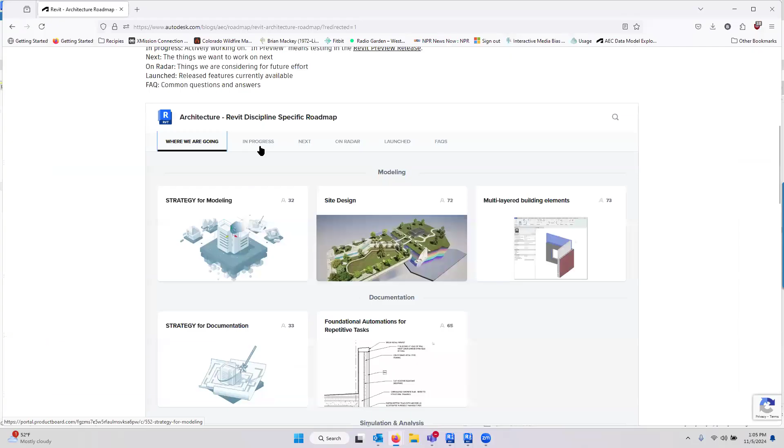So yeah, the Revit Roadmap does come in here, and you have 'where are we going,' which is the big picture, and then you have the 'in progress,' right? So go Google the Revit Roadmap, go ahead and look at this.

There were a few features in here where I thought, okay, this is going to be huge if it makes it into the 26th release. We actually joked with some of the programmers that if this one makes it in, it'll get everybody saying I want to upgrade now, I want to go to the 26th release. I could be wrong though, because most people are superstitious and don't want to upgrade anyway.

The other thing I played with a little before AU, because I happen to have Adam Sheather with... what is his automation company called? Is it Automation, or is that what it's called now? I thought it was something different, Bad Monkeys maybe. But anyway, Adam Sheather actually crashed at my house before AU, and then we went up to AU together.

The one thing he was also getting excited about, which we talked about a bit at Inside the Factory too, is that a lot of people don't know that if you have a project on Autodesk Hub, in ACC, and it's a 24 or 25 project, you can now go in and play with the AEC Data Model Explorer. You do have to enable it on your hub first.

What's really cool is you can come in here and sign in, and it shows you all of the hubs that have this enabled, and gives you the name of those hubs you're in. If you grab the hub ID and it's all set up for you, you can come down here and say, cool, I want to go run my hub, and it'll show you all the projects in that hub.

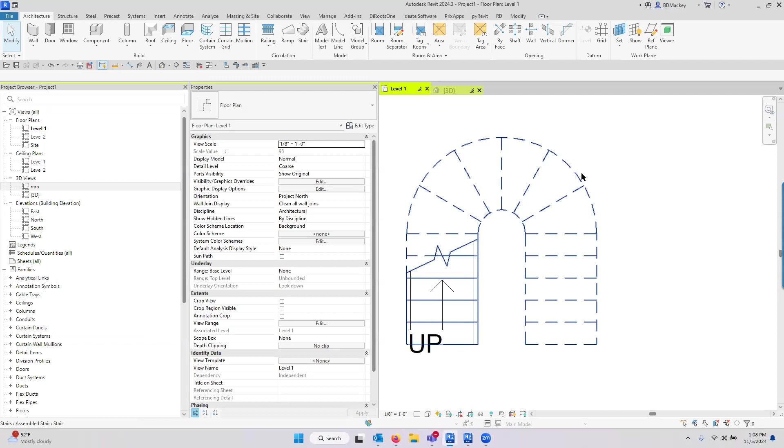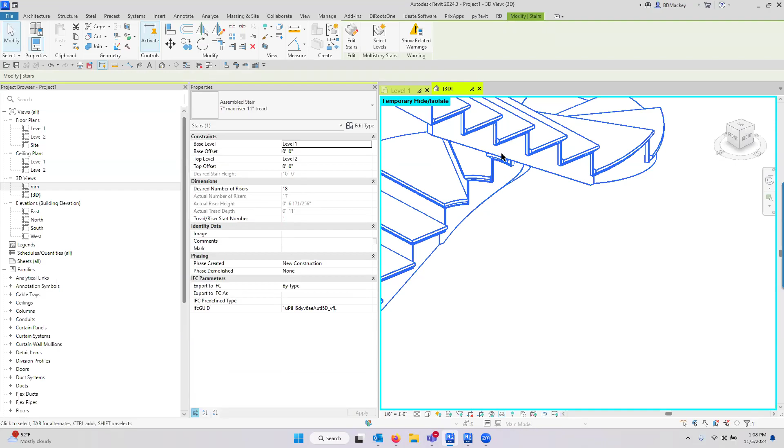He was saying he's trying to do curved stairs in Revit, and whenever he does these curved stairs, he cannot do it with a closed stringer, or excuse me, an open stringer, not a closed stringer. So we actually started looking at this in Revit. I was able to do this with an open stringer inside of here. The weird part is, for whatever reason in Revit, when you get a curve with an open stringer, you have to make sure you have an offset for the supports.

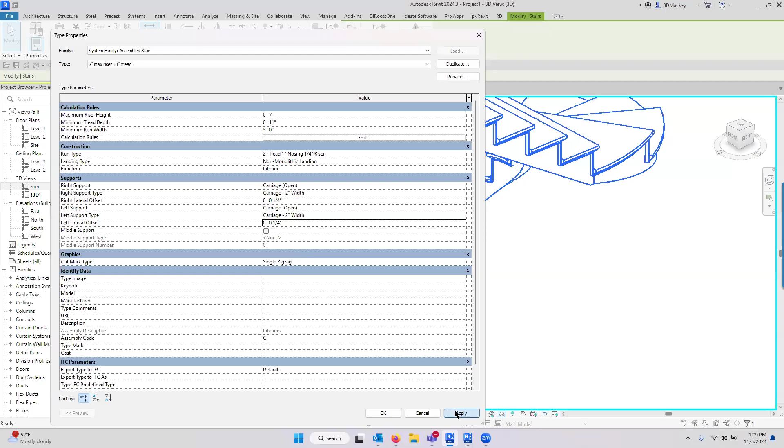If I go change these supports to be a zero offset and try it, it's going to say nope, I cannot do that. You have to have an offset in there. I don't know how big that offset has to be, I haven't really sat down and played with it, like can I make it a quarter of an inch? I have no idea, but you have to have an offset when you're going through and playing with it. Yeah, so it looks like a quarter inch, okay.

An inch would work too. So that's been a known bug. Honest truth, Chris emailed that to me, and I couldn't remember. I'm like, I don't get it, I know I've done that. You could do it, and then of course I tried it, and it broke. I'm like, wait, there was something about this, and I had to go through the database in the brain.

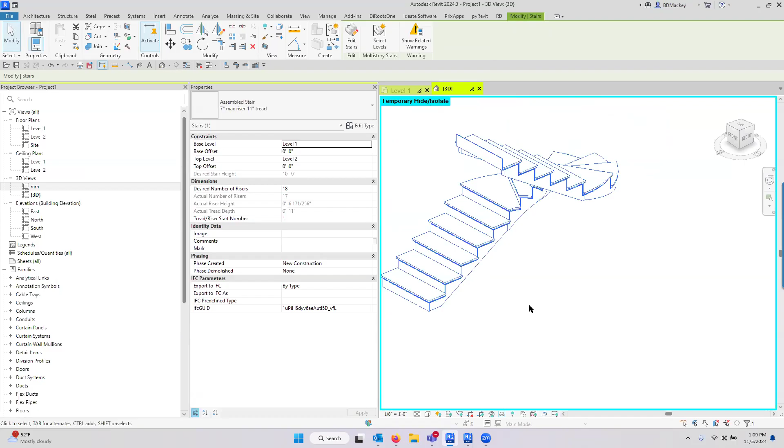So that's something you do have to have inside there. And while I was in here, I also wanted to show people, because a lot of people don't know this. When you look at the run type when you're doing a run, you can come in here and have the profile you're using go to the front and left, the front and right, or all three sides if you want. So you can change it from the default, which out of the box is just the front only. But if we have this, we're probably going to wrap that around, so you can change that nosing profile to go to only one side, both sides, or whatever you want. I always like to show that when I'm showing closed versus open stringers as well. Okay, so that was the first question I had.

Looks like we got some nice questions coming in, so what do we got there? Well, Jason had been asking about AU and inside the factory, so you got that. Nice work.

How about a quick one? Can text size be changed to points? So I'm assuming the short answer to that is no. The good answer is there's probably a calculator online that would let you do it.

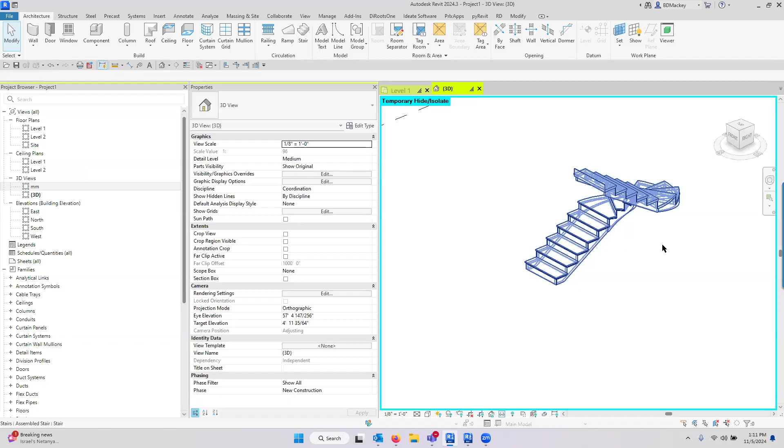Michael's asking that, and it's actually a good point. There are a lot of utilities out there that will let you take an Excel file, bring it into Revit, and create a dummy schedule with the headers and titles and whatever. But the problem with all of those is you have a point size font. When it brings it in, it doesn't choose which font in Revit for you, most of them create one, and there's no 3/32 equivalent in points. I don't think you can say make it a 13.75 point font in Word. That doesn't exist, so there's no direct translation. So yes, it's something, Michael, that does bother me that I know we have inside there, but there's no way to say, hey Revit, do this. I'm sure if you looked online there's probably some conversion factor saying if you want a 3/32, you've got to make it close to this, etc. But no, there's no way in Revit to say I want the fonts to be in point sizes.

Well, I think part of that, it would still make sense because all the fonts are scalable, right? It's an annotative object. So it's going to finish printing at 3/32 on paper. I've never known somebody to scale something on a piece of paper that is a point size. So that's it, nothing in there.

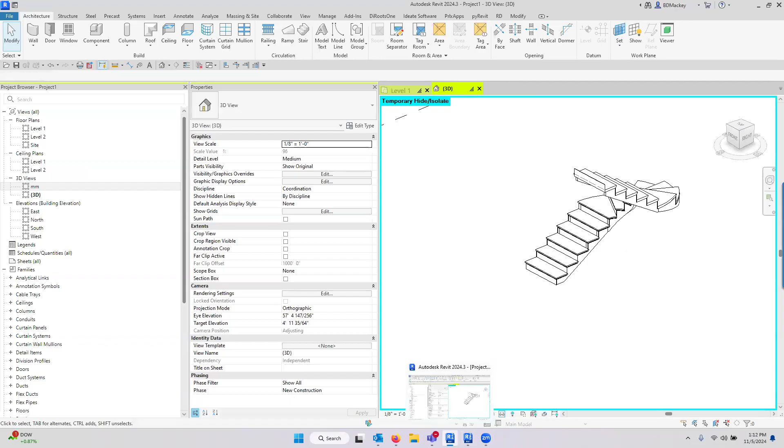Alright, let's see, Jason's got a couple on 2025, so we'll put those together. Do you have any clients using 2025 yet, and if so, are they experiencing any issues? I haven't seen anybody have any issues with it. I know a bunch of people did jump into 25. 25.3 is out, so anybody telling you they're waiting for the first service pack, they're full of crap. We're on the third, it's been out for it's been out, right?

It came out April 1st, so we are over 6 months past this. So if we're 7 months now, right? April, September, October, yeah we're 7 months in now. So we're in November, so we've had it for 7 months. I always laugh, people like, no no no, we're waiting, we're waiting, we're waiting.

But yeah, point three, or actually point two, gave us tab project browser now. The speeds are just faster. I do like the tab project browser, I'm still mostly staying in the home because I'm not used to it yet. Just all the little features we've gained inside there, it's been kind of nice, and I've noticed a definite speed improvement on this. So yeah, I have several clients doing it, they've all upgraded. One client recently upgraded from Revit 22 to 25, and it was on an ACC project, and we haven't noticed any issues in that either. So we did a full three versions upgrade and haven't noticed any problem with it.

Did you just do a cloud upgrade, or did everybody?

Ironically, we needed to move it to a different hub. So it was download all of them, open them all up, repath all the links. That was a pain. But once that was done, ironically, there was a lot less warnings.

Less warnings with MEP ducts needing to get detached duct taps and everything else, which I'm so used to seeing during most of the upgrades. So either that MEP firm did a really good job, or there was no issues with that in the upgrade.

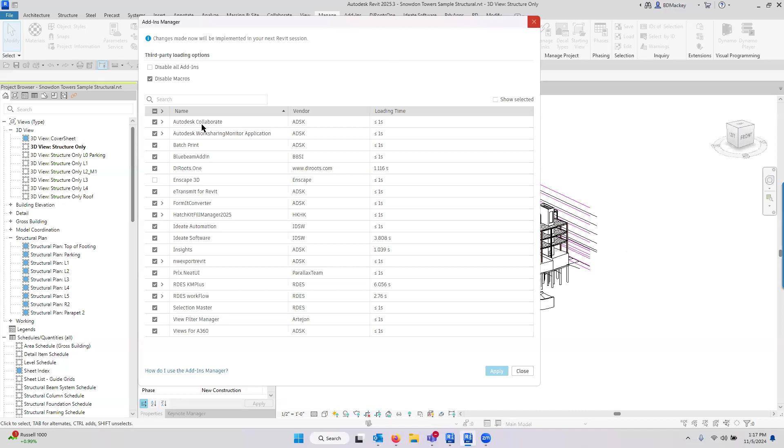But you do have this add-in manager, and like I said, you can say disable all, you can disable the macros, but it is kind of a nice little feature to be able to go through and do that too.

I like the time to load bit. You don't have to just kind of guess. I think a lot of them aren't accurate, like this one's like, oh, 6 seconds, but my Revit was taking 20 minutes to open when I had all my add-ins installed. I'm like, all of these are less than 6 seconds? My Revit should still be opening in a couple minutes.

Yeah, that's a little intense. Sarah's like, oh my God, that's the icon thing. Actually, Aaron Maller's the one who told me that. I did notice it happening to other clients, but I did not know what was going on, and Maller's the one who let me know it was Enscape. So I've disabled Enscape in all my versions of Revit. I'll turn it back on when I need it, but I can't have it hijacking my icons, because having four Revit icons down here that were the same was not doing it for me.

You don't like playing Revit roulette. Yeah, exactly.

Chris had a follow-up for Revit 25. Have you had any issues with Dynamo and add-ins in 25? I'm having some issues with a specific add-in, he thinks. I would guess probably because, when they updated Revit to .NET 8 from 4, a lot of those older packages are going to be having some issues. Personally I don't use a whole lot of Dynamo, so I probably wouldn't have noticed this, but I'm pretty sure there have been people complaining, oh, we had to go redo our packages with the new Revit .NET 8.

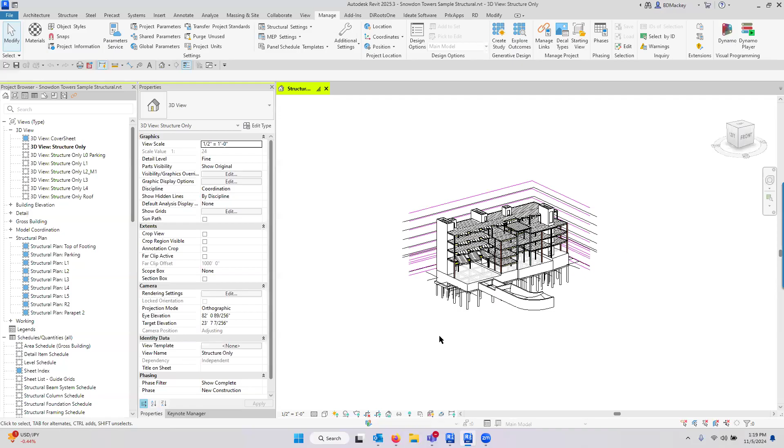I can't say for 25 because I've only used Dynamo in 24, but my problem was more with the changes to some of the nodes and the way you call things. John Pierson told me about it, of course. So they changed how you call up something — I can't remember if it was a view thing or an element thing, but we basically had to replace a bunch of nodes because they work differently. They deprecated some of the old nodes that were there and added new ones in their place.

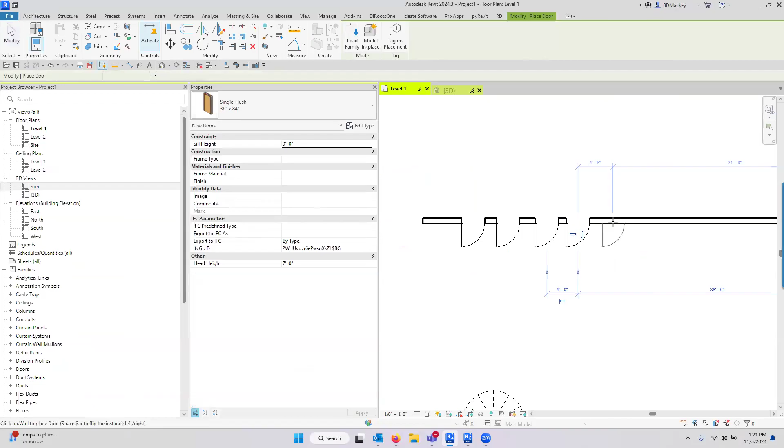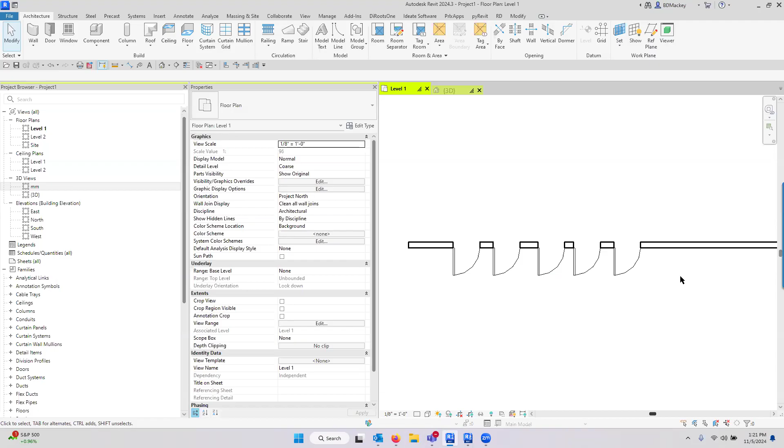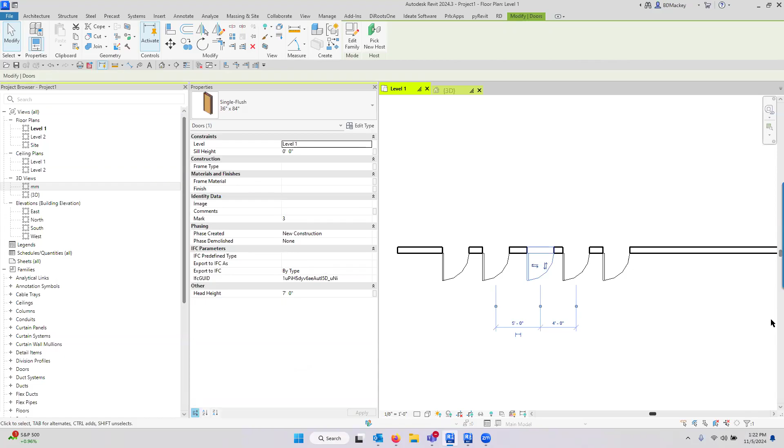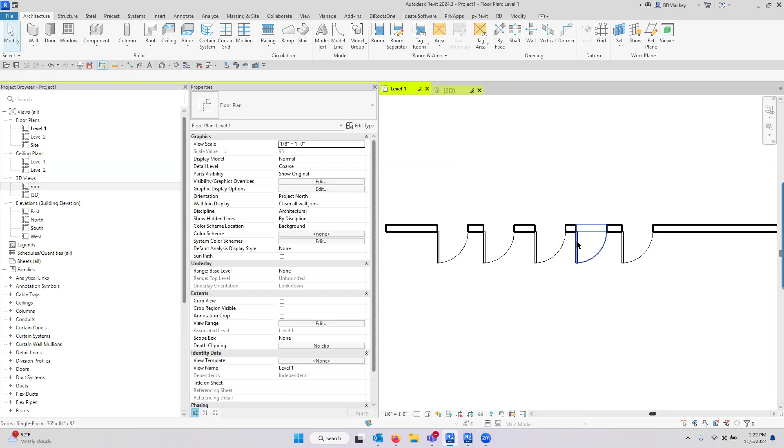The only thing you could possibly do is have a little schedule that extracted the data from these five doors, with a filter for just these doors that you put something in the comment like 'Homer Simpson,' and then your schedule is only going to schedule the Homer Simpson doors. I did have a client do that. Lately I've been doing the dumb schedules where you schedule something and use the titles for everything, so my filter is always 'filter equals Homer Simpson' because I know no one's ever going to put Homer Simpson in the properties of something.

If they do, all my schedules are going to break. Well, now. Then I'll just start switching into Marge or Bart or something like that.

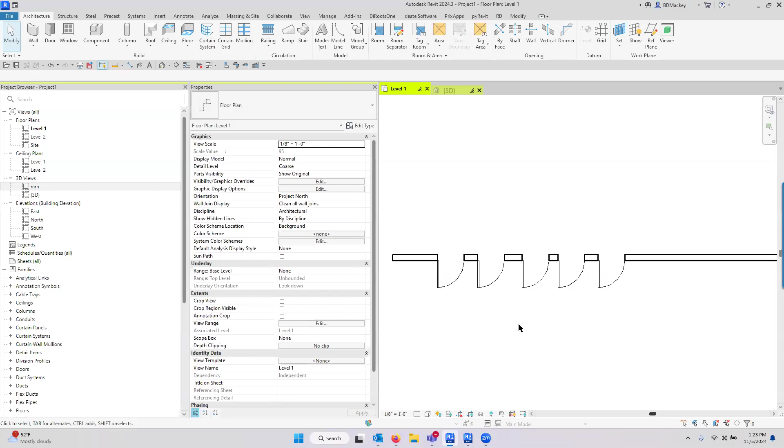But yeah, that's the only other way I've seen it done. A lot of people freak out like, no, I just want to see it on the sheet I'm in or on the view I'm in—I don't necessarily even have a schedule on top of it on the sheet. So that's the only possible way I know of to extract and total all of the data together on individual elements. Again, you could do a tag and then a multi-leader tag, but there's no way to get this multi-leader tag to calculate the values of all of those elements.

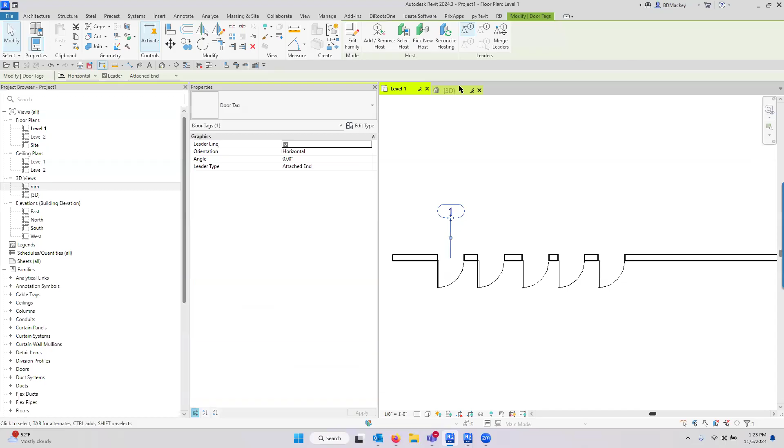So if I come up here and say I want to add the other elements—did I miss it? Add leaders... no. Add, remove host. There we go. Thank you, I have the sun coming in my window right now. Right, so you could do that, out of the box. There's probably not a type mark parameter on here, is there? Yeah, but you get the point.

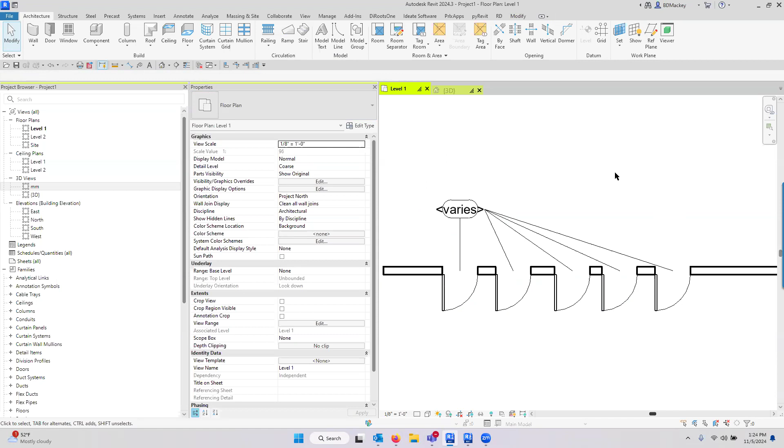So no, I have not found a way to say 'take the sum of this and this and this and all of those doors'—take the value of count, quantity, and add it all together. So I wish I had something better for you, but I don't. And then also, you're trying to say egress width total between all of the doors—again, not something I've been able to have inside of there either. So for me, unfortunately, that's usually a dumb tag I put right next to it, and I just put those values in.

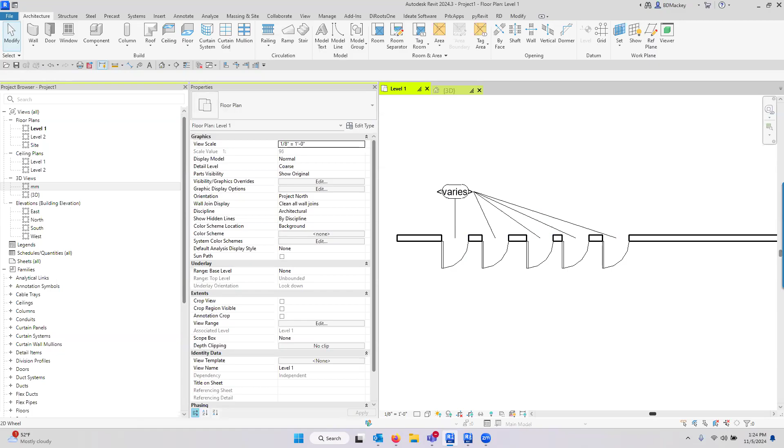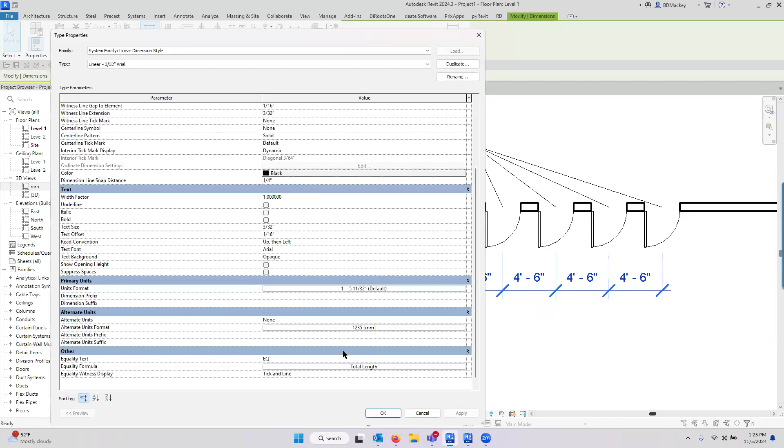Since we only have one other question, that made me think of something I don't think everybody knows you can do in Revit. I'll throw this out there while waiting for other questions: if you have a dimension string, especially if those dimensions are all equally spaced, I can come down here and turn off the equally spaced, but in your dimensions, at the very bottom, there's something called the equality formula. Right now when I look at this equality formula, I can start playing with what I wanted this to do—so I can have it say, cool, I wanted the number of segments.

So each number of segments we're going to have inside here—which one, two, it's the gaps between, or I could say the number of witness lines, which in this case would be all of the doors, whatever you're thinking of here. Then I can be like, cool, I wanted the length of each segment, move that up for the total length. So I could say the number of segments is going to be this, I'm going to put a prefix and a suffix, and I wanted the length of each segment to have the 'at' suffix in it, and I wanted the total length to have an equals in front of it.

When I say okay, nothing is going to happen here unless I go into the properties for the equality display and say, cool, I want to show that formula. So now I can say there's 4 at 4 foot 6, equaling 18 feet overall.

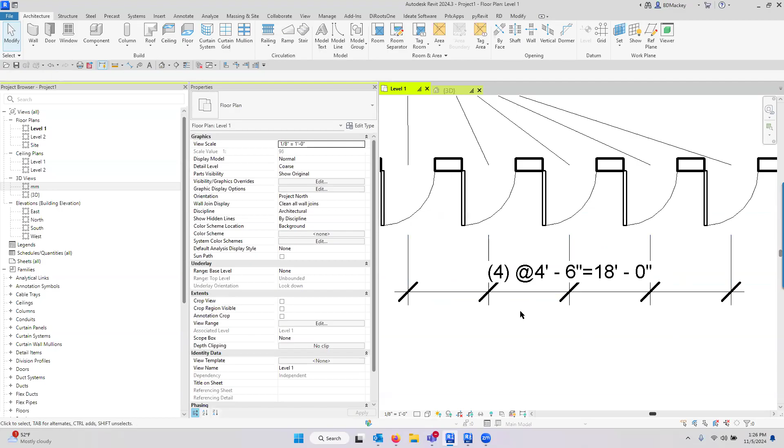So I don't think everybody knows you can actually do this with dimension styles, but you have that capability. I hate the fact that this is type based. So oftentimes, especially for my structural engineers, I have 3/32nds normal, 3/32nds beam spacing, and so on. You can start doing it in all of those cases.

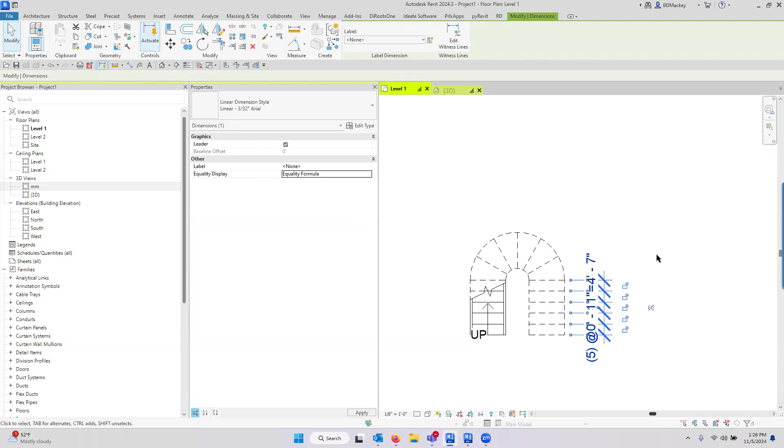Or even something like with your stairs, you could go in here and say, I wanted to do this with my stair. Grab this because they are all equal. Say, show me the equality formula, not the text. And again, I can say, hey, there's 5 of those at 11 inches equaling 4 foot 7. So you have the capability, as long as the values are equal, to kind of set this up.

That's definitely one of those things I knew was there long ago, but totally forgot where to find it. So thanks.

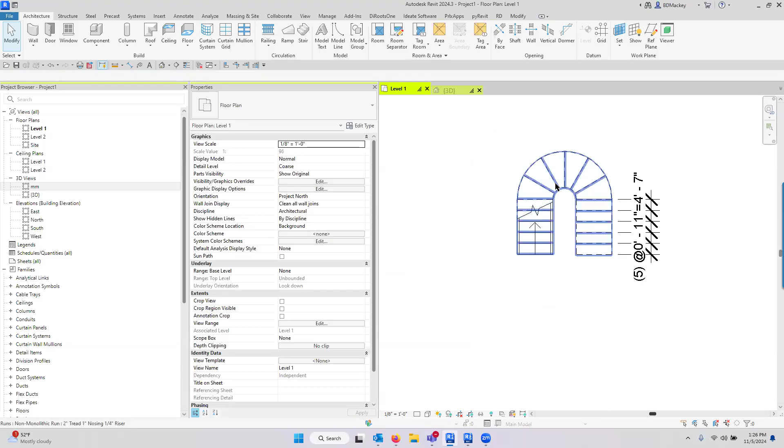Oh, just kind of like the stair questions. Like, wait, I know the answer to this, or at least I knew the answer, I did this that one time, like a decade ago. Yeah, no, I use this quite often, especially when I see people say equal, equal, equal, equal.

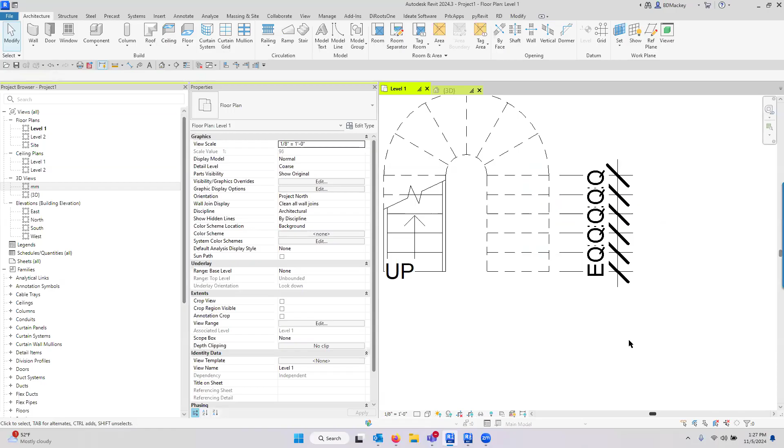I'm sorry, you can also do that here. I could change it from equality formula to equality text. That doesn't mean anything to me. So cool, they're all equal, but what are they? What's my overall distance? And then I have people do that, then they'll come in and do this and be like, cool, those are all equal, but it's 4'7". And I'm like, now you really have to math that. Why don't I just set the formula up and be cool? Here's what we got.

Yes, that does make way more sense. I love that feature. I always like to show it.

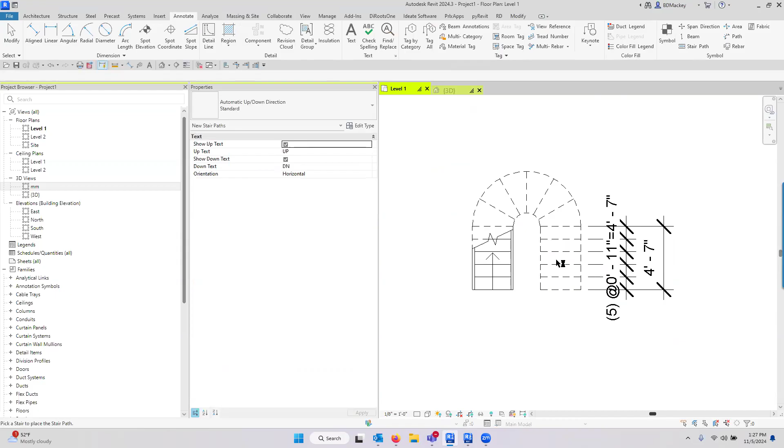The other thing for the architects in the room that I don't see anybody do, on the annotate tab, one of the tags you actually have, oh, I did not go to 3D, let's stay here, is stair path. You can actually tag the stair path of a stair, which is not that big of a deal, it's just going to give you the up down arrow like this. But you also have, where is it, I think it's under the tag area, tread numbers. So I don't think a lot of people know you can actually tag tread numbers inside of here.

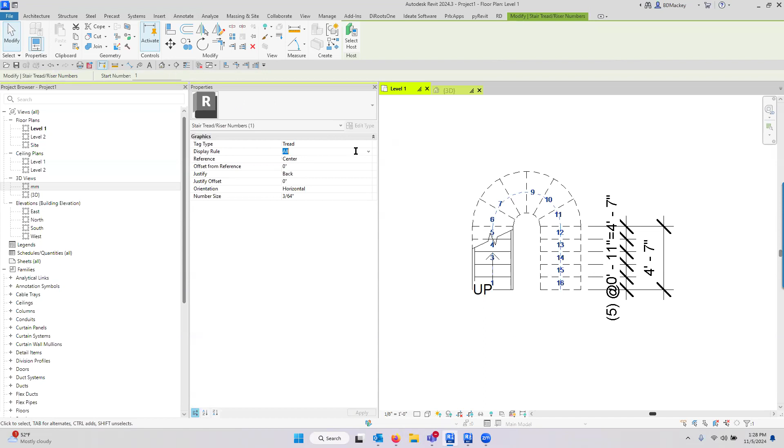Once you tag them, you can actually select it and see, cool, am I grabbing the risers or am I going to grab the treads if you wanted those numbers to change? What's the display rule? Do you want to display all of them, odds, even, only the start, only the end? You've got a little different options here. Am I going to the center of the stair, all the way to the left of the stair, or am I going to actually add all of them in here.

Excuse me, wrong button. All. Do I want to go to the center, the left quarter? It'll go to the quarter of it. You have a lot of different options inside of here. And then you can also offset it. How are you justifying it? Text can be horizontal, vertical.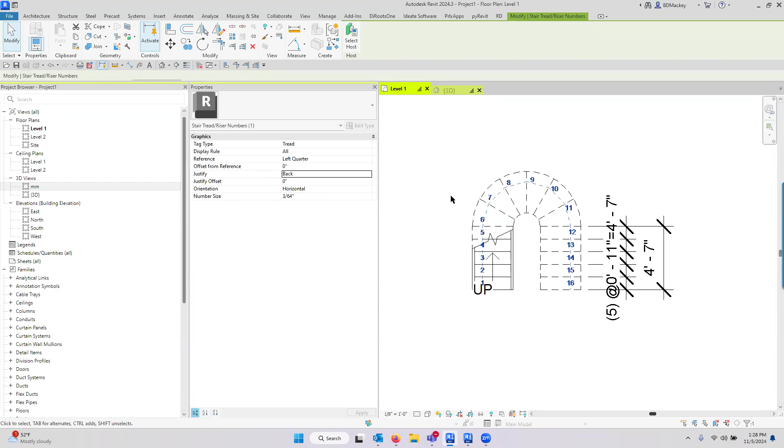And you can also do this in a section too. So if you happen to have a section, this is usually going to be a residential type thing. But if I go to that section, I can still do that tag, that tread number in the section. Well, that's fun, that's a fun feature.

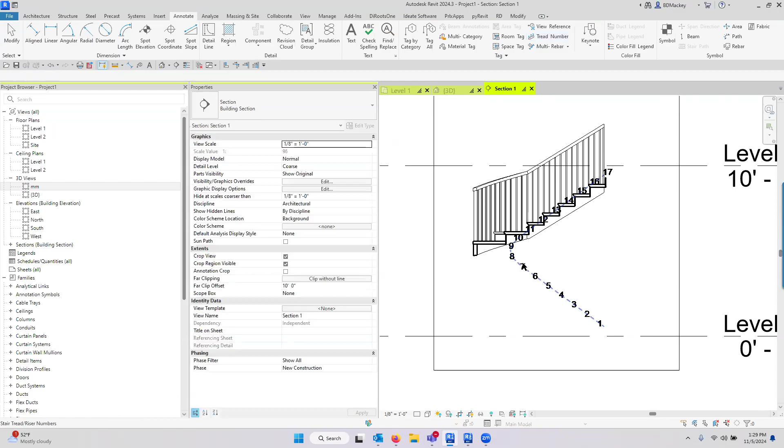All right, we'll flip it so we can see the other half of the stairs. Flip section. There you go.

So just one of those features that has a lot of different ways to be able to come in and start playing with this stuff.

Also, did you guys know that too? That if you grab a crop, I always see people going to a floor plan to grab a section to hit the flip control. But if you're in the section, you have to have a crop region visible. If you have a crop region visible, you can select it and say flip section here. So you don't have to leave the view to flip the section.

I use that one often. I just know after time I do it, people are like, wait, what did you just do? How'd you do that? Spacebar, unfortunately, does not work like everything else.

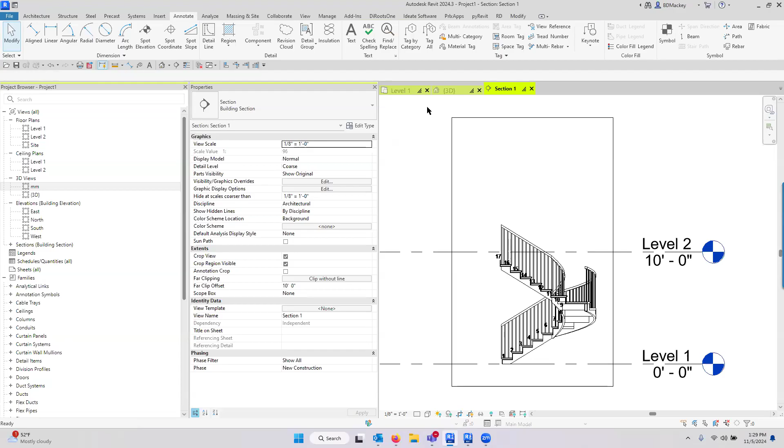I also learned something new inside the factory from Paul Aubin, and I did not know this. Did you know that if you have something and hit rotate, then hit spacebar, it puts you into the move, the place origin marker? Oh man, that's one of those I knew at one time and always forget. Yeah, I did not know that one.

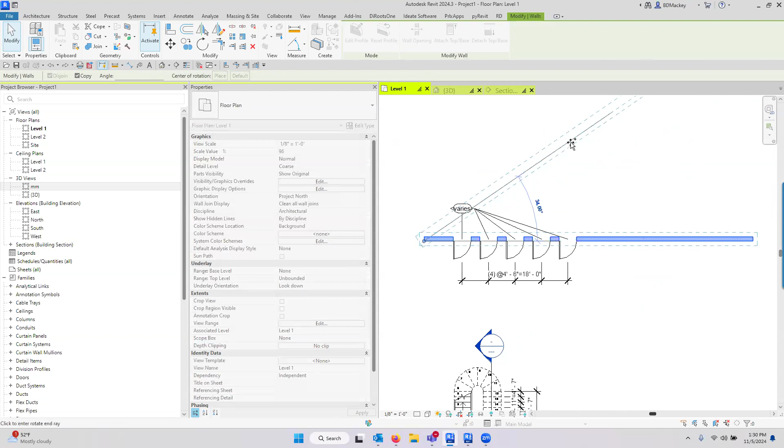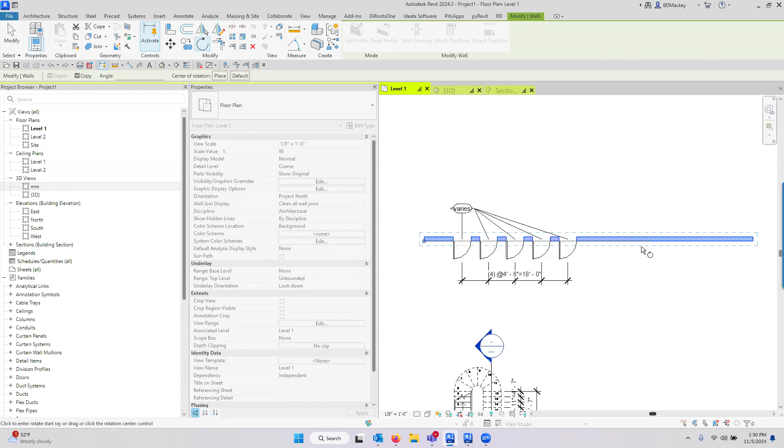I taught him one in return. If you just grab something and type R3 on the keyboard, it puts you into the place origin marker without even going into the rotate command first. I didn't know spacebar gives you that because I'm not usually a two-key typer. I don't want to put my donut down, so I hit rotate. I'm still old school, I drag the icon because I've always had to in old versions. So I rarely hit the place button. Just not something I do that often. But yeah, I did not know the spacebar was on there.

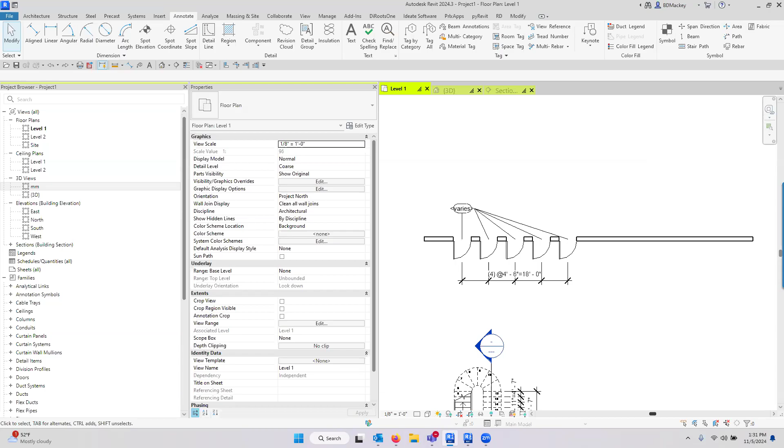Design option. So how would you handle bid alternates for submittals and removing them if not accepted? I would think design options, even though they are a pain for MEP. Ah, okay, thanks Rick, less confused.

So yeah, I mean, I know design options doesn't really work with MEP if you're trying to connect to a duct and do all of the analysis. You can use design options in your MEP stuff, you just can't use the calculations or wiring tools you need there. But if it's literally just bid alternates for now, you would start going in and doing those design options. So I know it's a horrible thing for mechanical, electrical, plumbing.

It's not bad for structure. It's obviously not bad at all for architects. But yeah, I think you're just going to have to go in and start using those design options to go through and do it. Now with that said, if part of that bid alternate is saying, yes, but if we do this one, we've got to double the size of this mechanical unit, then you might have to start modeling the whole entire run.

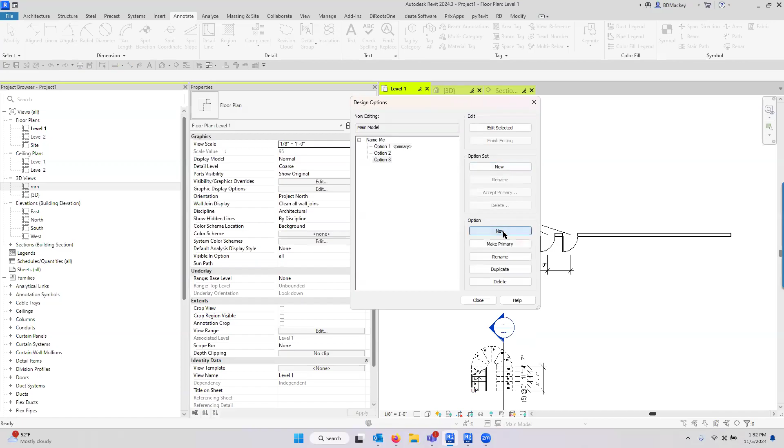I know oftentimes people freak out about that because they're like, cool, I'm going to go set up a design option, new, there's my option set. I always tell people to name those. It drives me crazy when it just says option set one. So give it a name, right? Then you can have a couple options underneath it. The one thing I always try to tell people when dealing with this, especially for you guys in the MEP world...

If you're like, cool, my option is going to be at the end, or maybe it's going to change out the rooftop unit, or whatever is going to happen, if you grab a series of elements and hit the little add to option set button down here, you can add it to all of those options at the same time. So yeah, it does suck if you come back out and try to reroute the path and you got to update it in all three, but you can use this button to put it into all three.

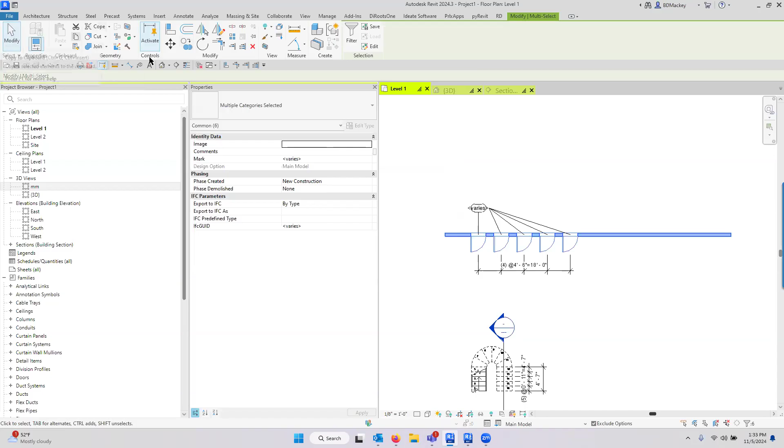Or alternatively, if you're like, man, I think I might need it but I'm not sure, you can copy or cut those to the clipboard, then go start editing those different option sets and just do paste same place. So if it's not the whole entire thing you want to do, some of it, cool, there's my same place for option one. Maybe I wanted it in option two as well. I have no idea, but you can start coming through here and tweaking it as you see fit for those different design options. Or switch to a 30-inch door.

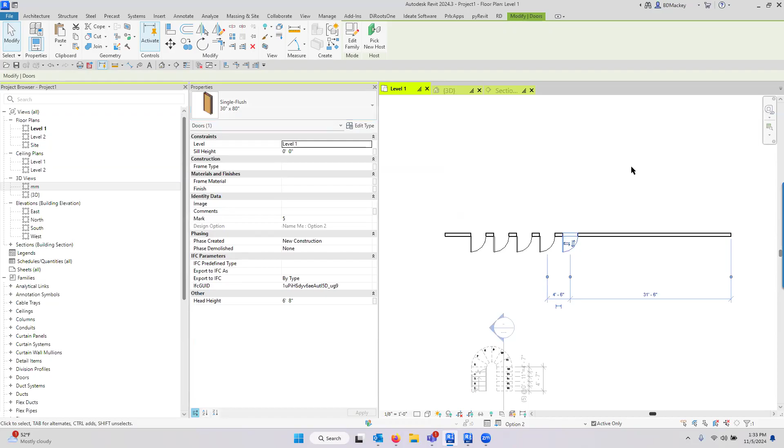Once you start saying, yes, this is the one we're going with, unfortunately architects are horrible at removing the other design options. So once you're all said and done with that, you go back to the main model.

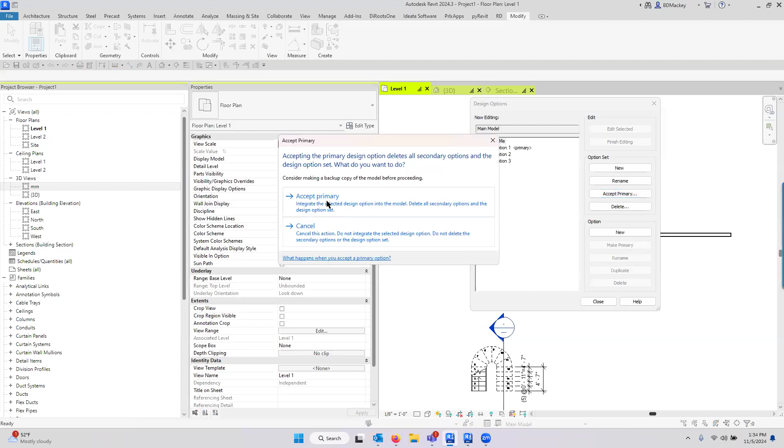When we come in here, whatever is primary, you have the capability to accept that as primary. I want this primary one to be the one we went with. When you accept the primary, all the design options are going to go away. What freaks most people out is once you do that, it's going to tell you it's deleting things.

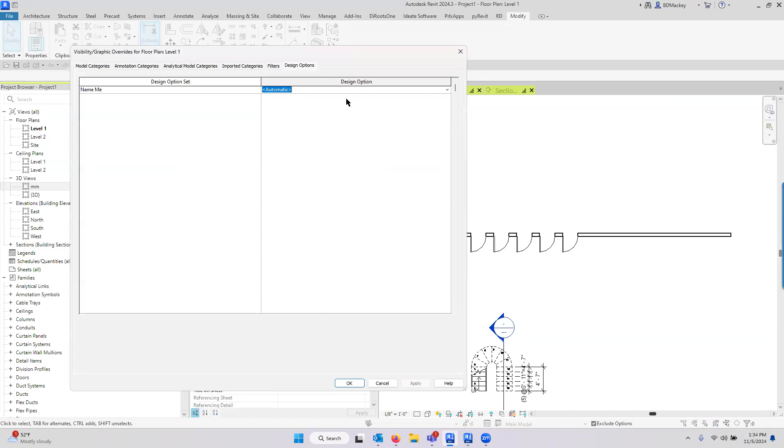This is why architects don't do it, because they freak out. Oh, it's deleting everything, oh my god, I can't do that. And the list is never one thing, it's like all of these views, all of these things, and it just freaks them out. That's what it's going to do, and that's why architects never get rid of them.

I go into projects, get as-built models from building owners, and there's still design options in there. I'm like, what the hell? This is not as-built if there's design options in it.

We would definitely get rid of the design options, but we would also always archive a copy first, because this is definitely the option we want.

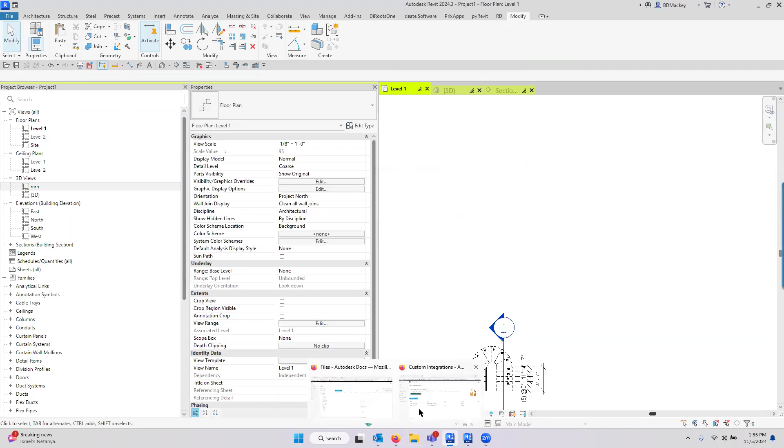Never happens. Yeah, exactly. They never remember anymore, like two months ago when we did that thing? Well, I stopped archiving. The only reason I stopped archiving is because in ACC, we literally have a version of everything.

So that's the biggest thing for me when I go in there: I put comments, like hey, this is when I synchronize before accepting design options, and then I do my design option acceptance, and then I synchronize again.

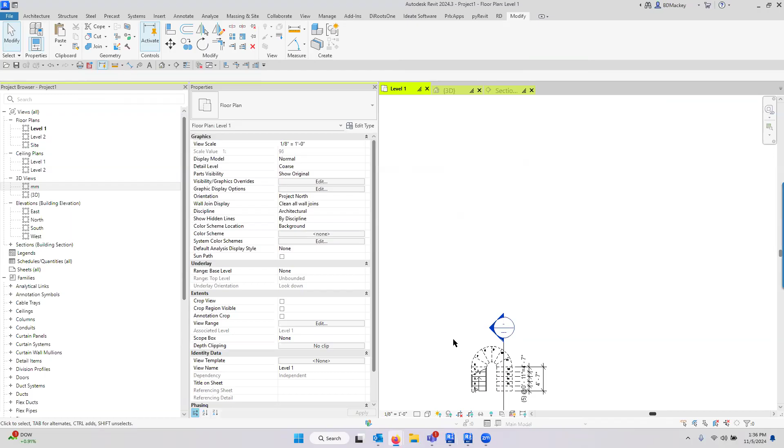I don't know if a lot of people have ever done this, but if you are in a project in Revit, when you synchronize, you can actually put comments.

And if you actually go in and put comments in there, that's not what I wanted to do, wrong button. I meant to say view versions. So if you go in here to version history, it will show those comments.

Oh, there was one. Where'd you go? I saw it. It's one of our students, blinked up there for a second. Oh, there it is.

For me, I always put comments of what I've done. I don't do it every single time I synchronize, but this is definitely my version of archiving if you're on the cloud. Nobody ever does this, but I do it all the time, especially because I'm not in clients' files doing a whole lot.

Hey, I opened with audit, I compacted central. I go through and I always set this up. But again, that's definitely my version of archiving now: hey, this was the end of SDs, this was the end of CDs, this was the end for 10%, whatever.

We accepted this design option, holy crap, we blew out all the blah blah blah because of a design change, whatever. I always put those comments in here. And then I don't remember what version it was.

You can actually say open on these old ones. We used to only have restore, but if you say open, what it's doing is opening a detached model of that version. So you can grab that version as a detached model.

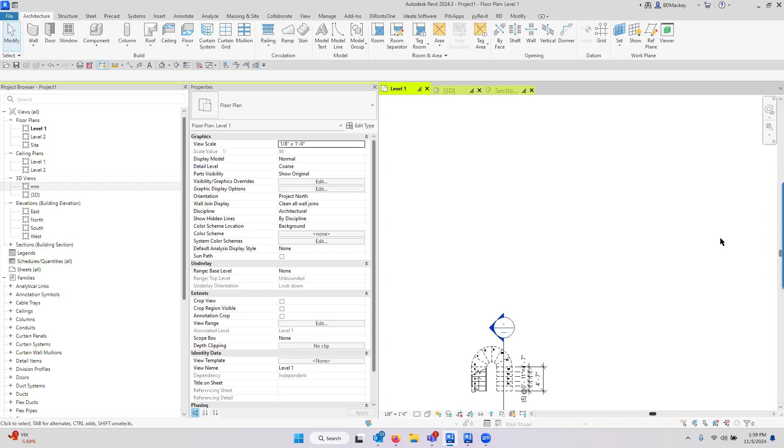I guess I was more wondering, does it upgrade all of your backups, or would you have to go back? It's 24, weird. I've done it before, but then I think it was some weird thing I had to do, and I was like screw it, I'll go download the published version. But again, I do that same thing on the published versions—I go add comments. Like when I open up an ACC, I will go add comments on some of those older versions or put a note in there.

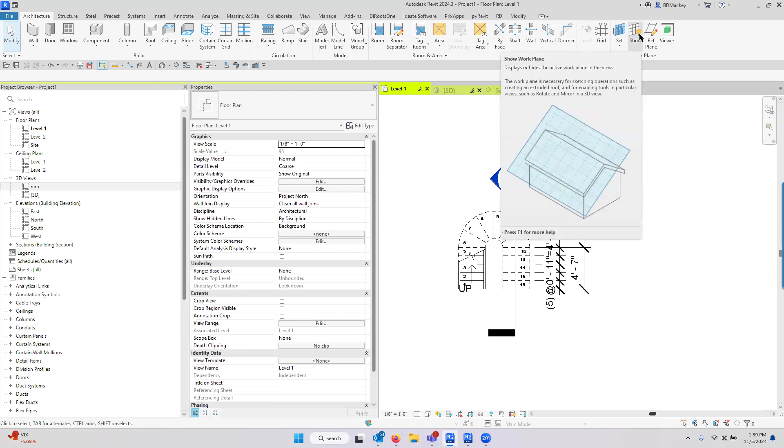So Jason, I hope that answers your question.

Would I use design options? Absolutely, I would—it's what they're there for. The worst thing I see is when somebody does a save-as in the model. I hate that, because then somebody says, cool, I want part of this, part of that, and part of that. Then it's a whole lot of copying and pasting, and half the time I'm like, screw it, I'll just remodel the damn thing. Yeah, that's true.

So what's our next question? Beth was asking if we know anything about the 24.3 Unifi issue. I don't know what that issue is specifically—there's so many issues with Unifi and searching in content catalog.

Beth, can you be a little bit more specific? Hoping Jason can answer, because Beth is so in tune with things inside the Autodesk Factory.

One of the breakout sessions was with the woman from Unifi, and it was funny because she came in—I was expecting her to start talking about how they're going to tweak it, but she just was literally getting grilled by everybody in the room. I felt bad for the woman. I didn't know her personally, knew other people from the old Unifi. She was literally shaking when we got in there, so I tried making light of it.

I think one of the big things is Autodesk is being very open, at least in a lot of things, about what their immediate plans are, what their immediate plans are not, what they're currently working on, and what's not even on the roadmap. So I think one of the things is try to get into Unifi, talk to the people at Autodesk who are the old Unifi people now on the Autodesk content catalog team.

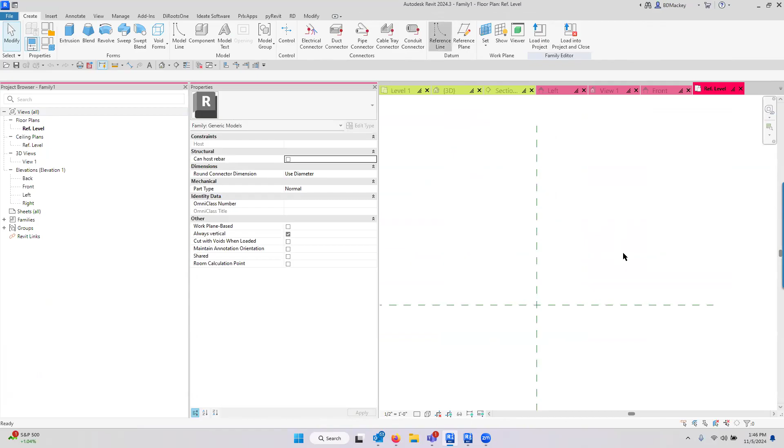I can do one real quick. By the time I find that family, I can probably create a new one real quick. So if I come in here and I do a reference line, and then I align the ends of that reference line to make sure it's constrained here and here, and then I do an angular dimension here, right?

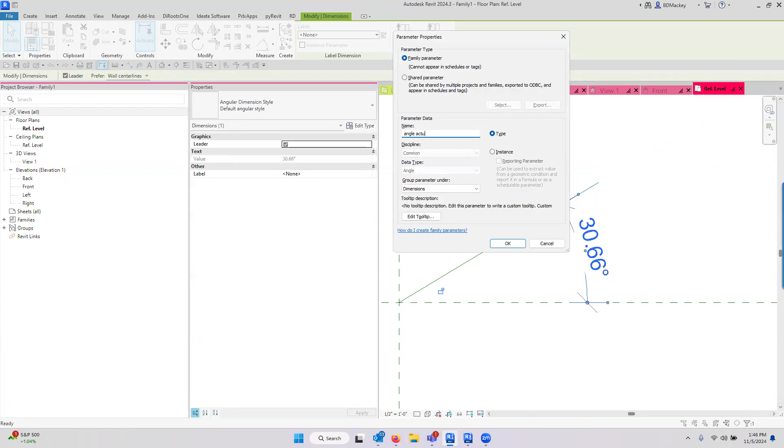I can come in here and have this one be the angle actual, right? So I'll create this one, and I do this quite often on things, angle actual. And the reason why that's called angle actual, and set up there, is because then over here I can have it be either or.

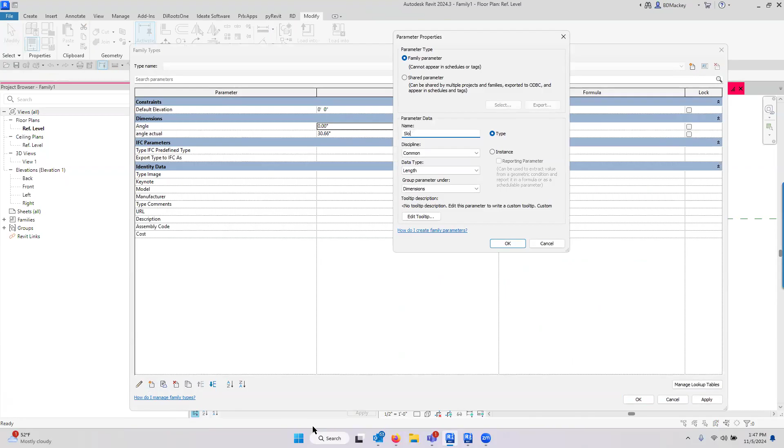So I can create a new parameter that's going to be like angle, which is an angle parameter, or I can have a new parameter that's going to be slope and have that be a length parameter, right? So if it's going to be like a 4-in-12 slope, so a 4-inch slope, right? Then under angle actual, if slope is greater than 0, this would be the A-tan of rise over run, slope over 12.

Otherwise, I can say use the angle, right? Or get a little bit more in depth, saying if the angle is greater than 0, then use the angle as well. So you can start doing something like this. If I come up here and say the angle's 3...

I'm just trying to expand you back open. What did I do? I hit, I think now I got to... oh, I have a 3 in here. Let's say, what is going on?

Right, so if I come up here and say, hey, this angle is going to be 3, then it's going to ignore the slope being greater—so I probably do, but I change this to 0, then it's going to say cool, it's 3. But if I say that's going to be a 4-12, then it's going to ignore the 3.

But I can't get both of them to update at the same time. I can't get this one to update that one because there's formulas involved in it. So, but yeah, you could simply do something like that, and I do this often. I call them 'actual'—hey, this is my angle actual, this is whatever. And I'm doing that because there's some sort of conditional statement in there doing it.

So then I can do the same thing here: if angle is greater than 0, then angle, else 0. So if I make this one 0, then that's going to be 0. This one 0, it's going to be 0. But if I come back and make either one of them have a value, it's going to give me the value.

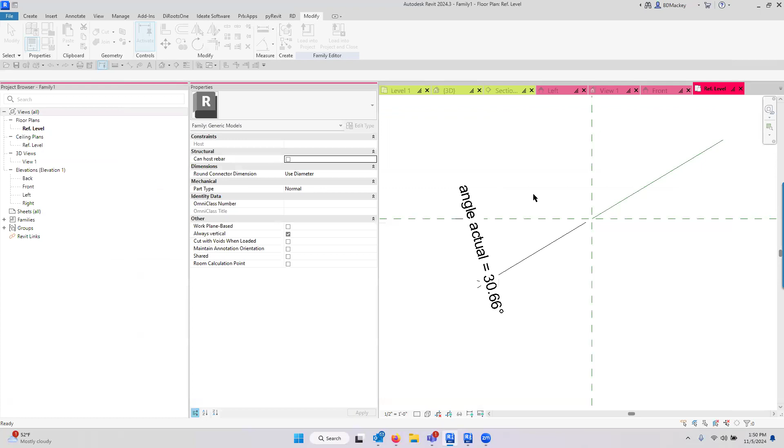So hopefully that made sense for you.

Oh, Rick's like, I don't understand what the lock is. So yes, the lock is simply this: if I've got a parameter here and a parameter here, right, I'm going to do a dimension from here to here, and then a dimension from here to here. And we're just going to call this one A... sure, we'll call this one B. I love Zoom and Revit.

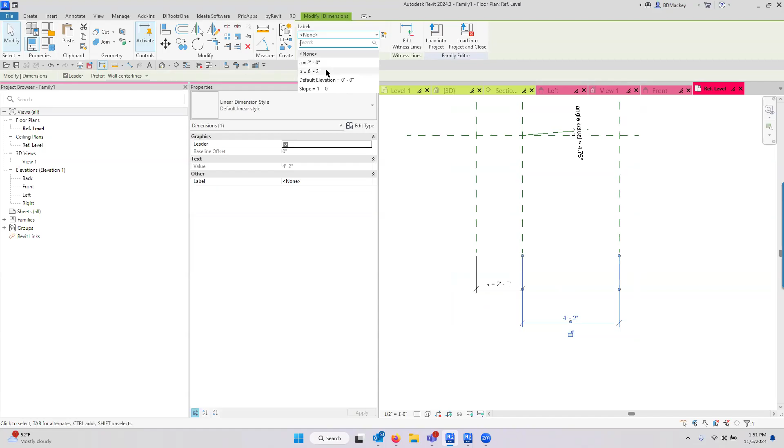It's so laggy, right? So what the lock does, and you can turn the lock on here, is that if I take this value and move it, it might adjust this one, right? And actually it would have been better to do this... I think, we change that back to B. Well, but that one's pinned in location. God dang it, because this one's pinned.

So let me take this, let me delete this. No, yes, hang on, shut up. And delete the whole thing. Delete, move this over here. And then let me dimension that and make it A. This is a way better example.

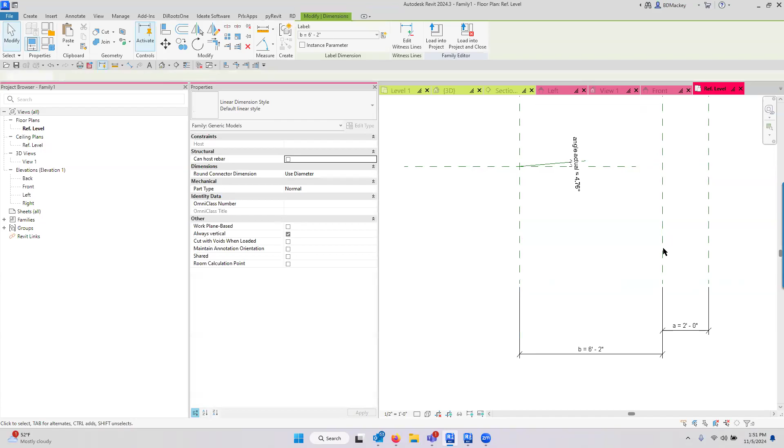Make this A. So if they're both unlocked and I take B and start moving it, B is going to change the size of A. But if I lock this and this, and move either of them, that's going to come along for the ride. That is literally all the padlock does because I said 'lock value', so that's literally all it does.

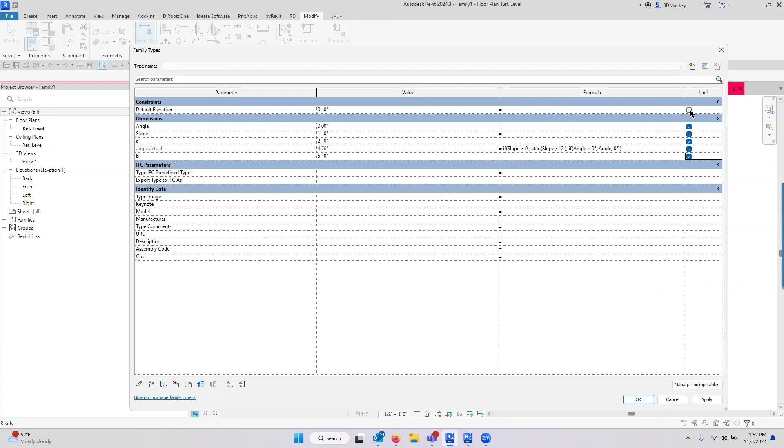Yes, it's the same when you're locking it on the screen. That is literally all it does—it's saying, hey, if something moves on the screen, am I going to maintain this value or allow the value to stretch? I lock all of them because I usually treat these things as based off of each other, and I don't want one thing stretching and not the other. So my habit is I lock them all in the family editor.

All right, so there you go. Cool.

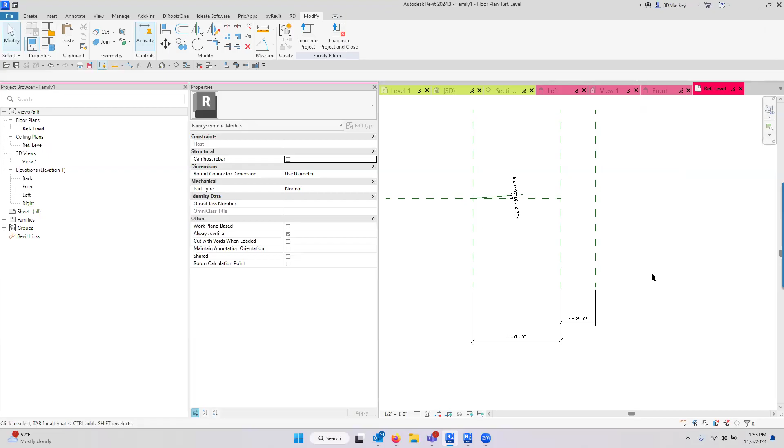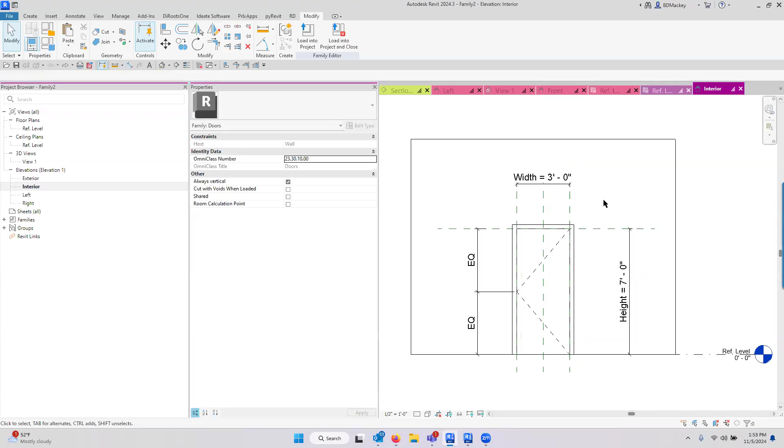Yes for dimensions, no for reference planes. It drives me crazy when you start with the out-of-the-box template and you get this frame projection interior or whatever equal dimension—this one pisses me off. I have an equal dimension here in plan, but then I have to go to the elevation to see the width dimension here. You're like, cool, I want to delete this... it's actually letting me delete it. I didn't think it was going to, but I want to delete this and it won't let me. So the easiest thing I always tell people: draw a new reference plane, drag that dimension to the new reference plane, delete the reference plane. That's how you get rid of dimensions that are in there.

So I think it's this frame projection interior—if I just try to hit delete, no. There used to be something in here, I don't remember what it was, that you just could not delete one of those dimensions. So yeah, grab the dimension, grab its grip, move it to something you can delete, delete the something you can delete. But the reference planes, if they were created in your template, no, you cannot delete those. Like I can't get rid of the center one there—can't do that, it's stuck. Probably can't get rid of the front one either. There's just no way to delete those objects.

Oh, there's my otter, who's giving us all takeaways.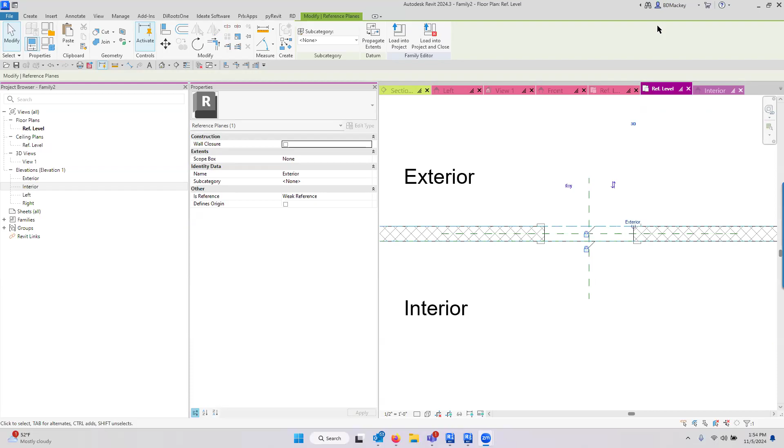So Jeremy is asking, not necessarily for a demonstration of the workflow, but do you know if it's still possible to replay a journal file to automate repetitive tasks across multiple Revit files?

Absolutely, it depends on what your journal file does. Journal files are used by Autodesk for regression testing, which means they are very particular in the way they're set up, designed to figure out if Revit is going to break. So everything has to match pretty much precisely. If you're saying, hey, I did something in project A and I want to do that in project B, that is never going to happen if you're selecting elements or doing things like that.

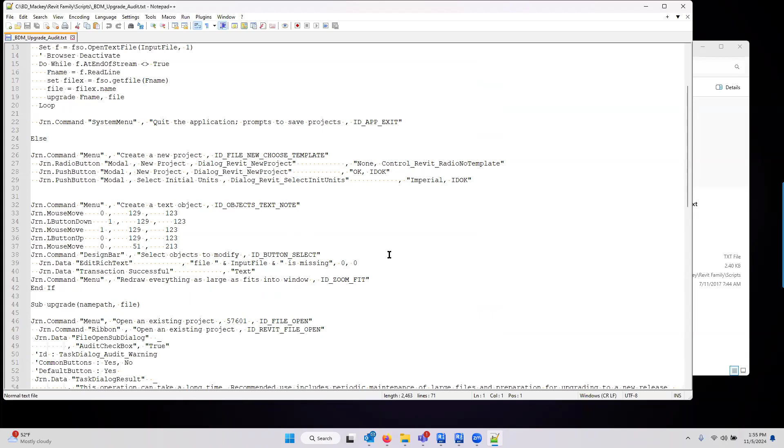But I use journal files for quite a bunch of things. I use journal files to upgrade my families every year. Inside of here, these little TXT files are all my little lists of the journal files I like to use every time. The biggest one I use is my upgrade and audit file—it opens files from a list with an audit, saves them, closes them, and is done. The way a journal file works is you drag and drop the journal file on top of the Revit icon.

The way this journal file works is at the very beginning it says look to this file—use this file as your opening file to get all of the families you're going to be using. For me, I have a little BAT file, it's called my Revit projects, where's my BDM, RFA—sort these by types. I run this little button here and it just creates me a list of all the files when it's done, so I get a list of families. I should probably go into an actual folder of Revit families.

Go ahead. Now this file has been updated today, and this is literally a list of every family in this folder or any subfolder, and their location. Then when I drag and drop that icon, whichever icon or journal file it might be, onto the Revit icon, it just starts going through that list and running it.

On some of these, it might break, saying there was an issue in this family, or you did this. The biggest thing with journal files, like some of those other ones I had where I was upgrading the arrowheads because I didn't like how they were named, is you try not to record your journal file by clicking on the screen.

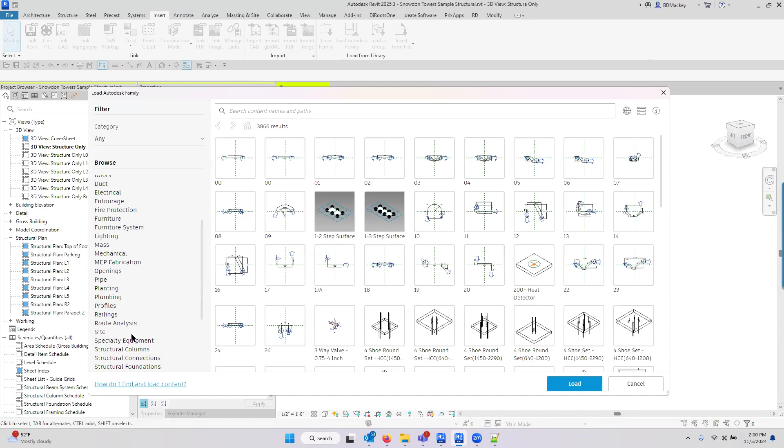Oh yeah, then down here you can see you've got the, sorry I keep saying ANSI, the AISC versions. Otherwise you just go to the old ones. So these are the old ones in Revit, and these are the newer versions. But you can also download those, I just forget where that is.

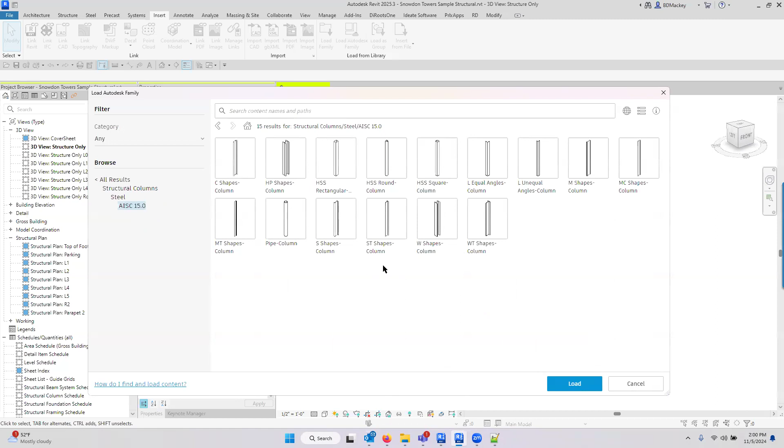Cool, and what's our last one? All right, our last one is: can you show how to get roof framing to slope correctly with reference beams and columns along an exterior wall, to show the roof framing pitching to drains along the cross slopes?

How do you get the framing to attach to one another so we don't need to try to adjust framing piece by piece? So if you open up the sample Revit structure file from 2024 or 2025, it is done inside there.

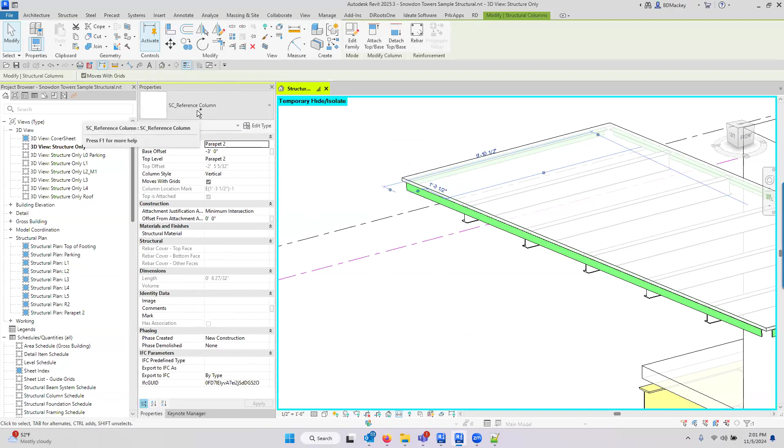So in the Revit structure sample project, I did this inside of here. If you actually look inside, if I do a selection, you're going to see that in my structural columns, it's called the reference column. What's happening inside of this file, I should have selected something first, I have a column inside of here.

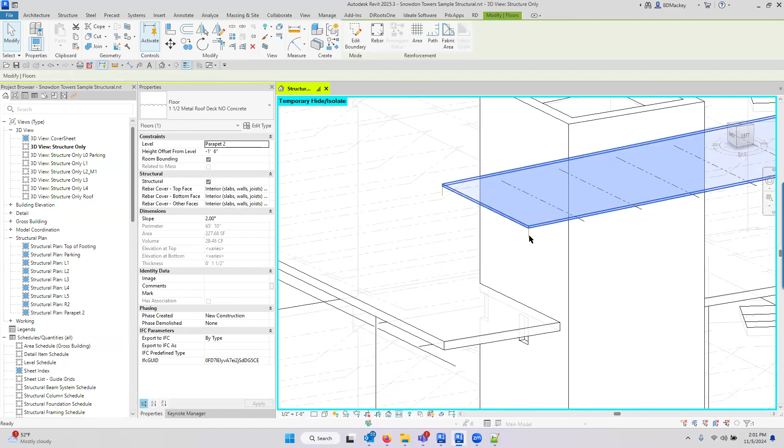If I go to a coarser level of detail, you should see these little orange lines. These are my reference columns. When I draw a beam, in the properties of a beam you have a start attachment type and an end attachment type. By default, that value is set to the end elevation, meaning you are putting it at the end elevation.

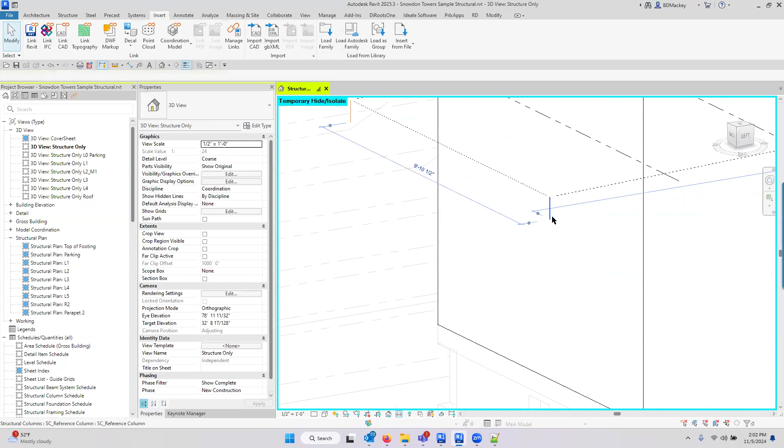If you are modeling this into a column, you get the distance option, which means if the height of this column, or the top of this column, moves up or down, I am going to move with it. So then I take this reference column and use the attached top to attach it to that floor, that roof.

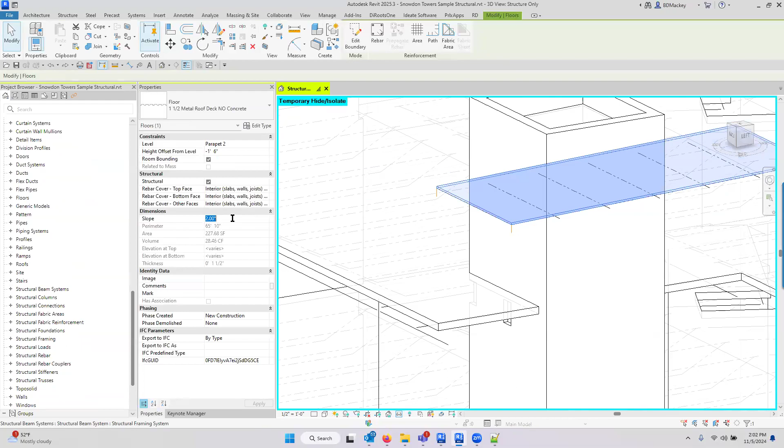So if I undo hiding my roof, all I have to do then is take this roof, change the slope, do whatever I want to do to it. And as I do that, that column goes up and down with it. The beams go up and down with that column. The beam system, which uses these beams on the outside, then goes up and down with it when you start looking into it. The downside of doing this, if it mattered to you, is by doing it this way...

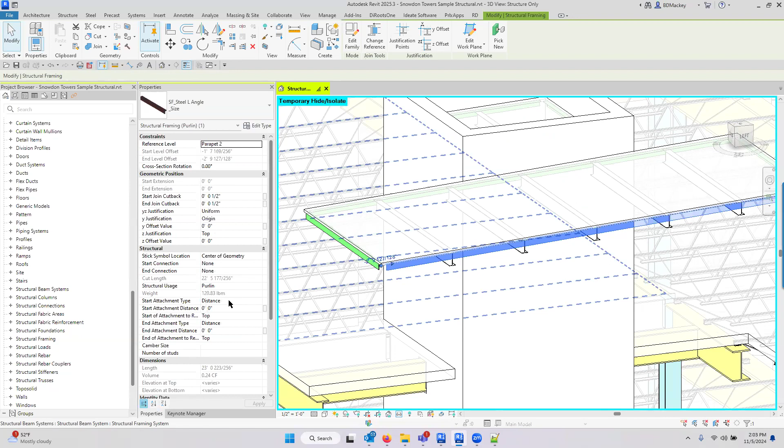By doing it this way, those beams stay plumb. If you wanted them to be perpendicular, this is not the way to do that. But yeah, so I modeled these as regular beams. I just changed all of them to have a distance, not an end elevation, or sorry, changed it to distance. I modeled those into my reference column. That's the reference column. Did a beam system inside of it.

Now it all moves together. I could even just play with the offset of the roof and be like, no, I wanted to go up to 2 feet, and everything goes along for the ride. Again, I did not use the underneath side of that slab as a reference work plane. I did all reference beams.

And I believe if you go to AU and Google slope framing, I believe either myself or Desiree has done one of those in there.

Yes, if they're plumb and I'm in a floor plan, it makes it much easier to dimension to each one of those elements.